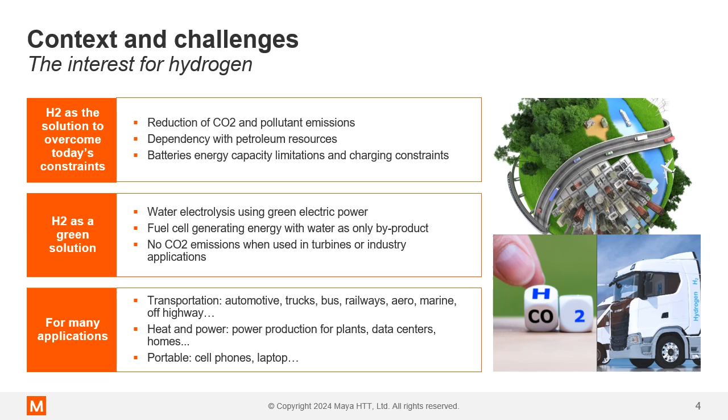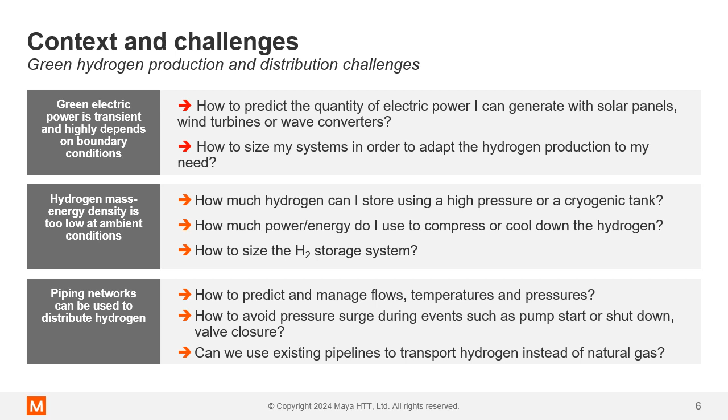Now, let's consider how simulation can help address the hydrogen industry challenges. With simulation at large, we have a typical set of challenges to overcome. For example, what effect do changing conditions have on my system's performance? How should I size my components relative to performance requirements? What about auxiliary systems like thermal considerations or even cost? And how can I predict and control conditions such as pressure, flow rate, and temperature without a prototype to test?

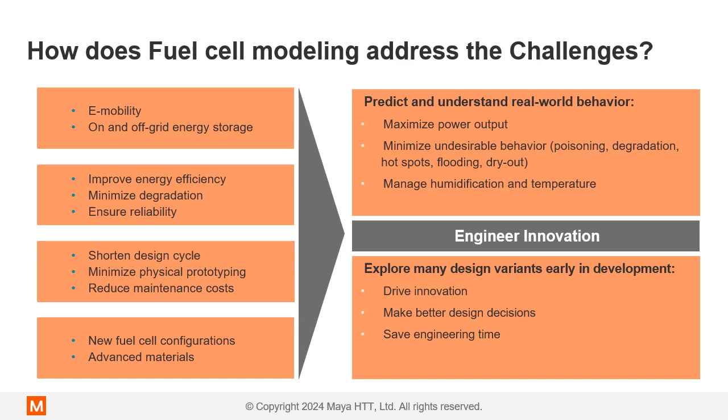Modeling and simulation offer a quick and effective way to assess the performance of many systems, including those in the hydrogen industry. They allow us to predict real-world behavior, improve efficiency, ensure reliability, and evaluate multiple configurations, all while minimizing cost. Any and all of these are possible given the simulation capabilities offered by Siemens Simcenter solution.

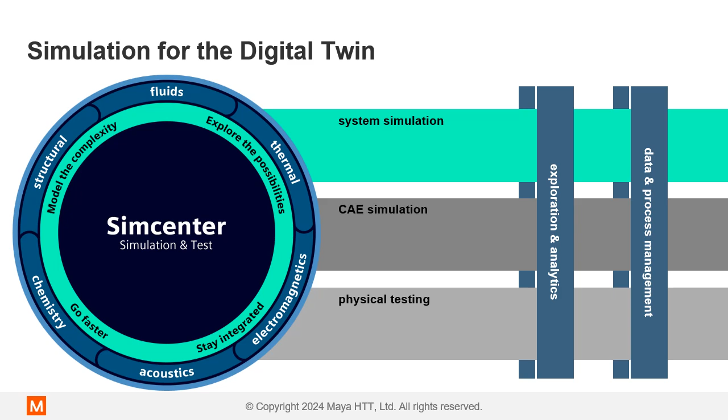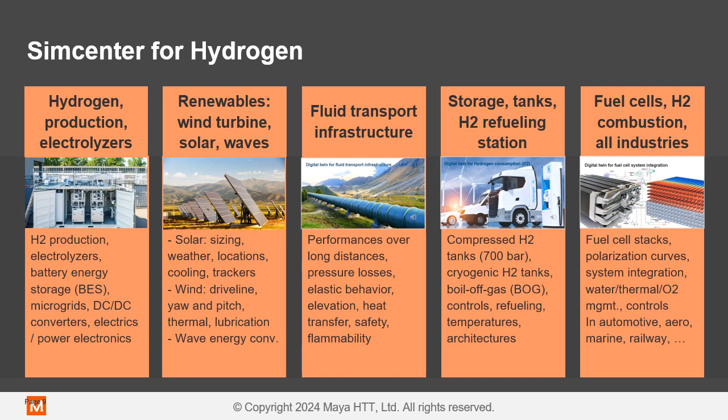So let's begin with looking at how simulation can help you produce a digital twin, first for green hydrogen production. With our system simulation tools, we're able to model all parts of the hydrogen production network, including alternative energy sources, electrolysis, and onto storage. These system simulation tools are able to predict in seconds the distribution of hydrogen production over a period of months, with mixed energy sources coming from things like wind turbines, solar panels, wave energy converters, and more, then feeding energy to the electrolyzers to store the energy afterwards in hydrogen tanks.

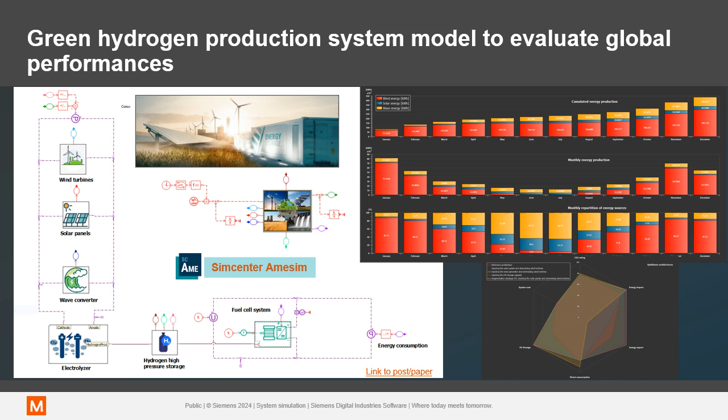So you can see here an assessment across a year in terms of the contribution of different green energy sources and how they fed into the system for the production of hydrogen. If we wish to look at a more component level in more detail, then we can use something like CFD to do the simulation of the electrolyzers themselves in much more detail and spatial resolution.

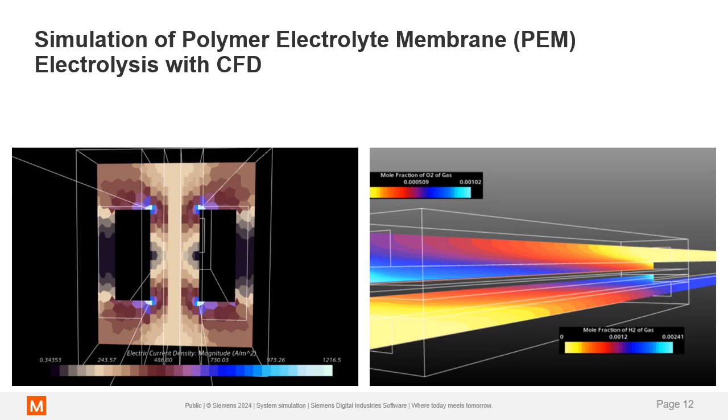Now let's consider our second example, digital twin for fluid transport infrastructure. There are a number of different possibilities for modeling and simulation to come in for the transportation infrastructure.

First would be transportation of purely gaseous hydrogen, where we can look at things like sizing and selecting compressors, and looking at the valve conditions for flow and pressure drop across the system.

For liquid hydrogen transportation, we can do other things like heat exchanger selection and design, looking at operating conditions to avoid things like pressure surge, and also being able to predict cavitation and flashing, and then evaluating methods for mitigating that.

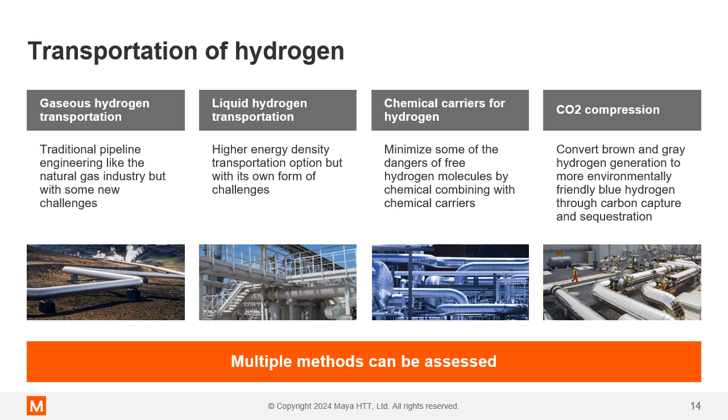On the storage side, we can use simulation for tank filling, which can allow us to model and capture things like pressure rise, temperature evolution, which in storage can reach critically high values, as well as capturing the buoyancy effects, including stratification of the fluids in the tank.

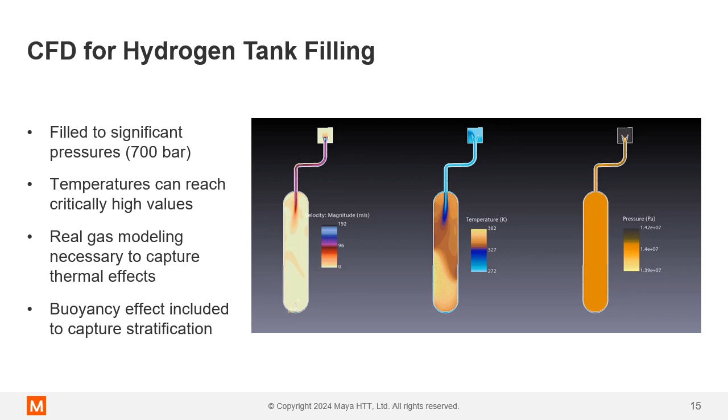Additionally, the Simcenter portfolio offers a complete solution to cover the end-to-end simulation process for something like hydrogen storage. We can cover the component design thanks to a strong CAD integration, leveraging our best-in-class finite element preprocessing, and then also our capabilities for the simulation for composites manufacturing and the simulation of composites in a structural context as well.

All of this can come together, for example, in the problem that you see in front of you, which is the structural analysis of a Type 4 storage tank made with composite materials.

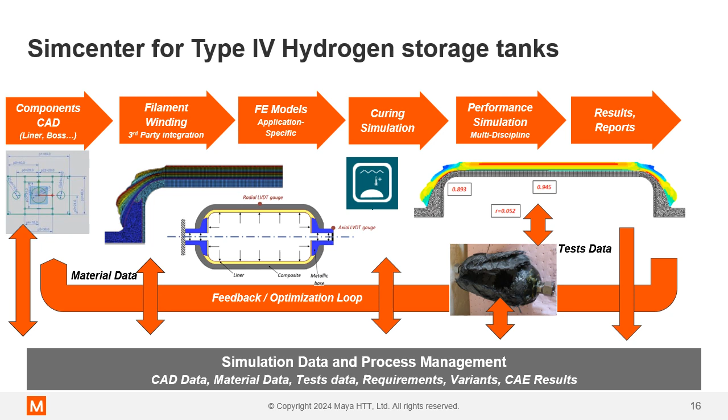The fourth use case I'll introduce today is one of the digital twin for fuel cell systems integration.

Simcenter comes with a set of models and tools dedicated to the fuel cell stack simulation, from functional models to more advanced ones integrating more and more physics at each step.

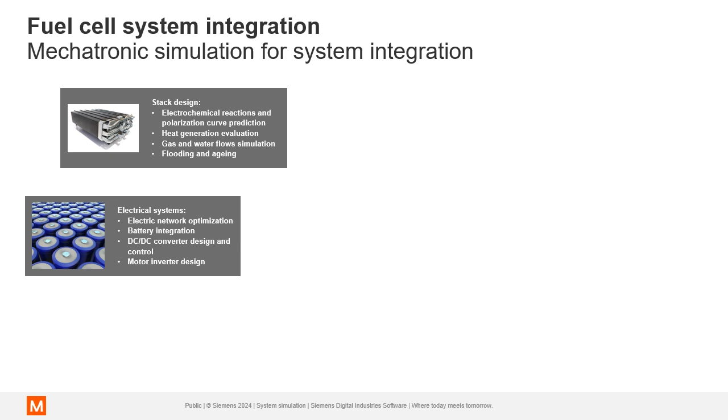Basic stack design is possible, integrating electrical systems like the battery integration, DC-DC converter design, or even motor inverters. Looking at thermal management of the entire system, predicting stack temperature, looking at thermal exchanges and cooling options.

Modeling of the air and hydrogen loops to look at the dynamic gas flow and the composition of those, including humidity management. Extending the simulation to the powertrain for electric motor and driveline design, as well as the overarching controls for different energy strategies, and also for the strategies for the feeding of fluids into the fuel cell.

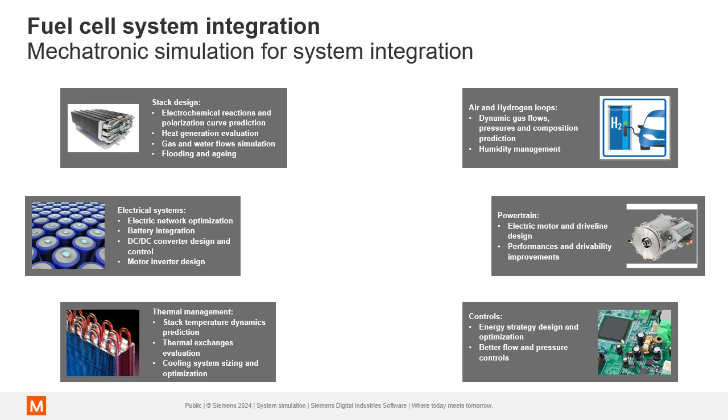All of this can come together, either one or all, to represent subsystems and their interactions and integration together.

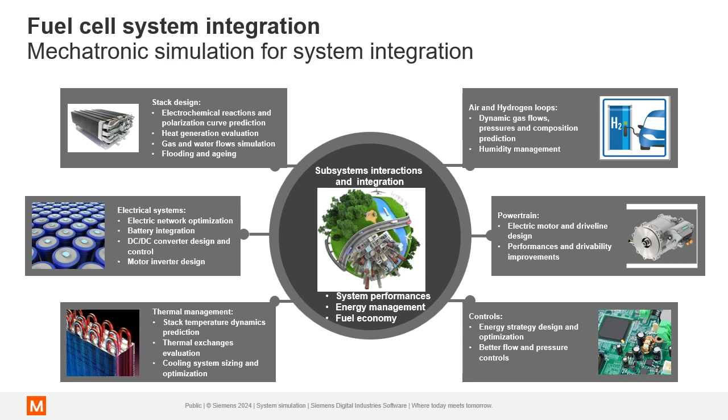When you need to go deeper into detail with the design of the fuel cell system, you can integrate more physics into your model. Instead of looking at just the fuel cell as a single component, you can integrate more details and consider even more subsystems and add them as your project matures.

You can now evaluate the interactions between stack, cooling system, air and hydrogen feeding, and the extended complete electrical network. With this type of model, you can also more accurately evaluate the stack performances and losses, taking into account temperature, pressure, gas composition, and humidity.

This type of model also makes it possible to evaluate the impact of the compressor and other controls on the whole performance of the stack, and the impact of these controls on the efficiency of the entire system.

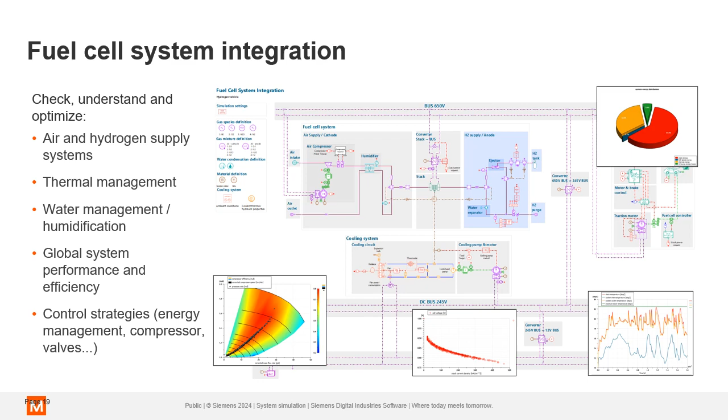Again, if we want to go to the geometry level, a more detailed analysis is often possible with CFD as well.

Modeling of fuel cells with CFD allows for single phase for proton exchange membrane, where any number of reactions can be specified. Multi-phase flow for proton exchange membrane fuel cells as well, where we can look at flooding and membrane dryout. We can even predict parasitic reactions for the lifing of the fuel cell, or just tracking things like sorption.

Additionally, we can do single flow for solid oxide fuel cell analysis, once again for modeling any type of reaction, and also electrochemical and ohmic heating can be accounted for.

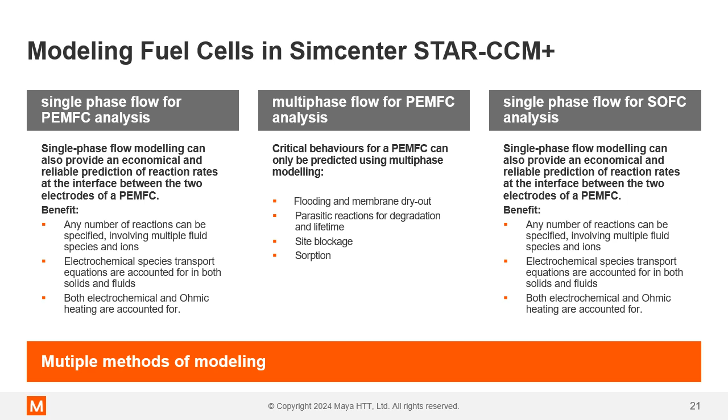Now we'll move on to simulation for hydrogen consumption, and here we'll split this into two parts. First, we'll start with the stationary applications that we mentioned before, like combined heat and power, and residential applications.

So for this first example, we can extend the scope of our simulation efforts by looking to include the entirety of the infrastructure in question.

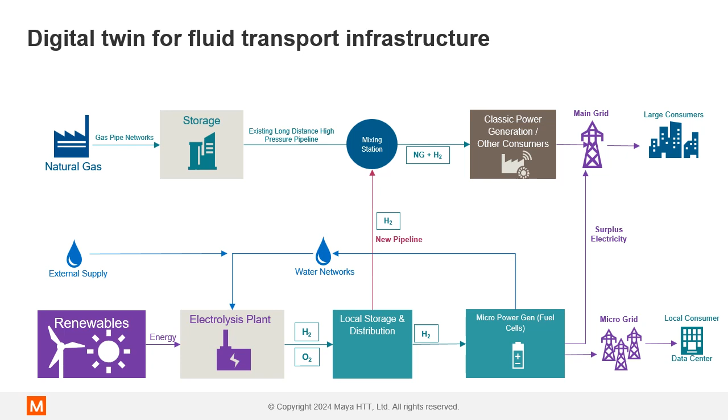So in the example we see here, we're looking at a green hydrogen-based microgrid that was built up using system simulation. More of the focus is put here on the electric side by modeling, for example, the microgrid that we can see, the DC-DC converters and other components as well.

Ultimately, the goal of this model in particular is to optimize the global system efficiency and consider thermal management. We can see here the breakdown of energy across either a day or at the month level across a year.

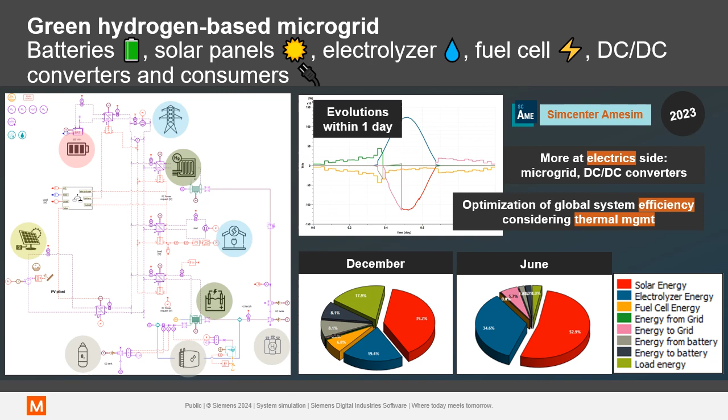Here we see a second example where we've taken a solid oxide fuel cell in a combined heat and power residential system. This model differs slightly because its objective is to show a system model of the complete residential system with reformers, afterburners, batteries, grids, loads, and controls, where we're actually looking to evaluate the total cost of the energy production depending on the energy mix across a year.

Depending on the energy mix across a year.

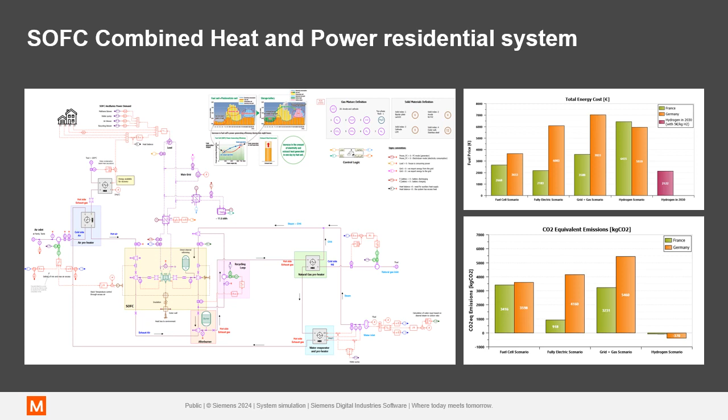So as a counter to that, we can move on to the digital twin for hydrogen consumption, this time in terms of the transportation industry.

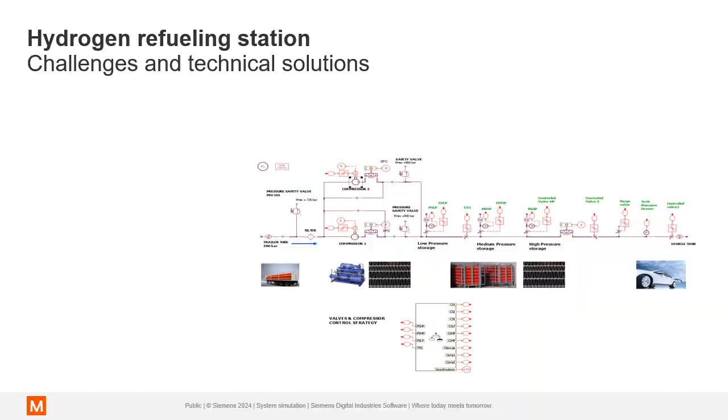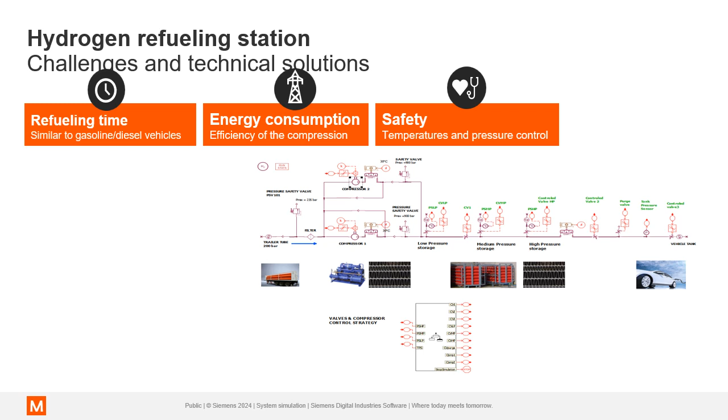And here we can see examples for not just the vehicles that use them, but also refueling. So we can consider the following challenges for refueling stations. Refueling time is critical and needs to be close enough to conventional methods to be worthwhile. Energy consumption needs to be reduced and mitigated as much as possible. Safety is of utmost concern and must be validated for all different scenarios. And obviously cost minimized as far as possible without impacting quality.

So all of these can be assessed by looking at a system architecture in terms of the entire refueling station, and we can see that here in this example. This allows us to do some basic analysis which will inform component design and sizing of things like heat exchangers, compressors, and valves, as well as evaluating different control strategies in this system.

So do we need to include multiple compressors? Do we need accumulators or buffers in the system? How many vehicles can we realistically connect? So on and so forth, as well as evaluating different alternatives for the architecture and then performing robust analysis and optimization as well.

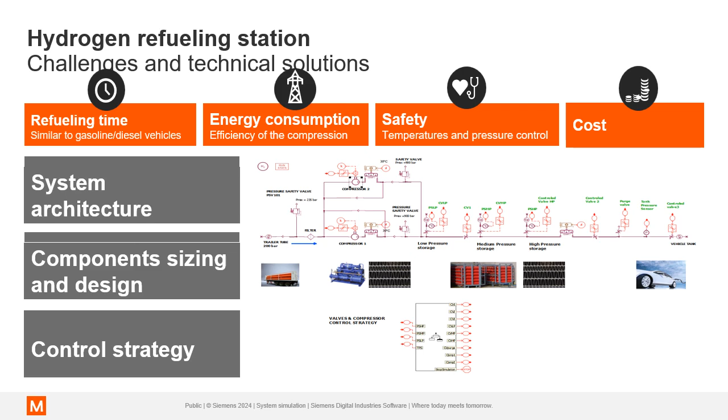So a model like we previously saw can give us a lot of useful information. The results of that model can allow us to quickly evaluate the evolution of pressures and temperatures of the flows in different parts of the system.

We can predict the time it would take to fill a vehicle tank and then also recharge the fueling station's pressurized tanks and look at the temperature depending on the speed of the refueling and evaluate control strategies to manage that. Additionally, we can look at sizing the heat exchangers to keep the gas in the right operating temperatures depending on what part of the process we see.

Also allows for the animation of a lot of these different parts of the process for better information delivery in terms of the results.

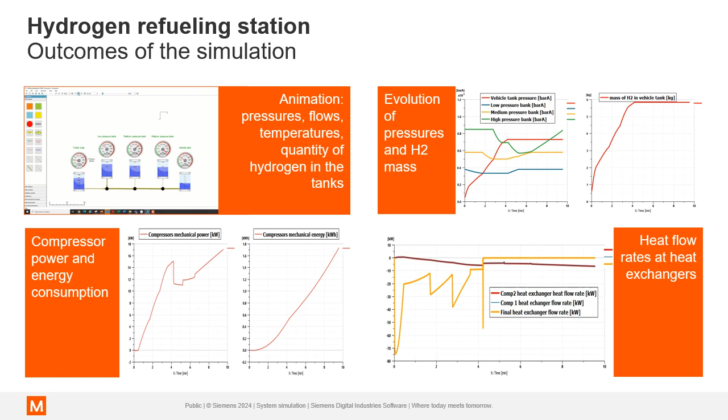Beyond just the modeling of refueling stations, we can also look at the integration of fuel cells in the actual vehicles. So in this case, those can be placed in any of the major streams of transportation, whether that's automotive, where we can evaluate vehicle type, road conditions, and the drive cycle's effect on the fuel cell.

In the marine industry, where we can evaluate then things like sizing for the sea state, the propeller parameters, ship resistance, and the different missions, as well as aerospace, where we can also look at the flight mission, the power budget, the flight dynamics effect on the performance of the fuel cell.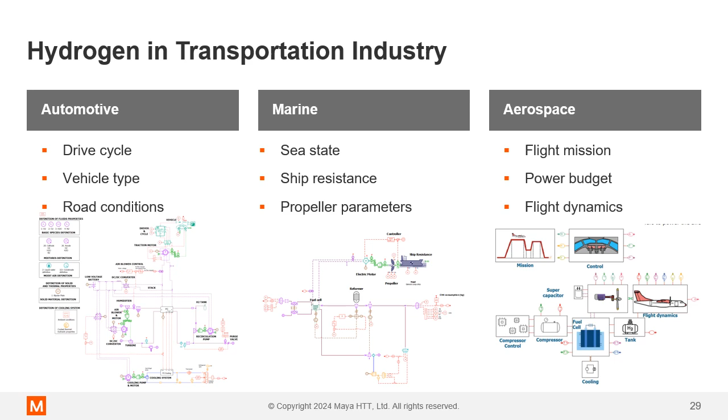Beyond just modeling of the fuel cell integration into a vehicle, we can also do the simulation of hydrogen combustion, where we have things like modeling and simulation of hydrogen turbofans, where we can select the correct architecture, validate the on-design results, but also predict off-design performance and thermal considerations.

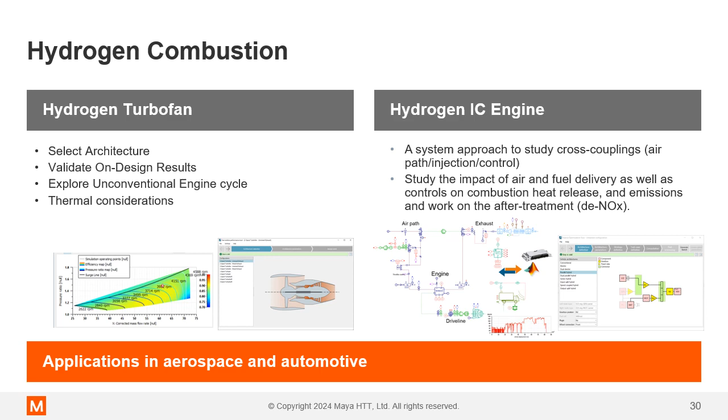Additionally, for the automotive sector, we have hydrogen internal combustion engines, where we can use a systems approach to study the coupling of the air injection and control, and then the impact of air and fuel delivery on things like emissions.

So in conclusion, simulation with Simcenter can really help address challenges of the hydrogen industry across the board. The extensive multi-physics platform can allow simulation of any part of the system or all of them together. It allows for sizing of subsystems and components and looking at various operating conditions.

We can better integrate those subsystems at a really whole system level and improve performance in the short term or large scale for improving ROI. It allows for more detailed modeling of systems to really better understand component behavior or system behavior, whether it's at a microscopic or macroscopic level.

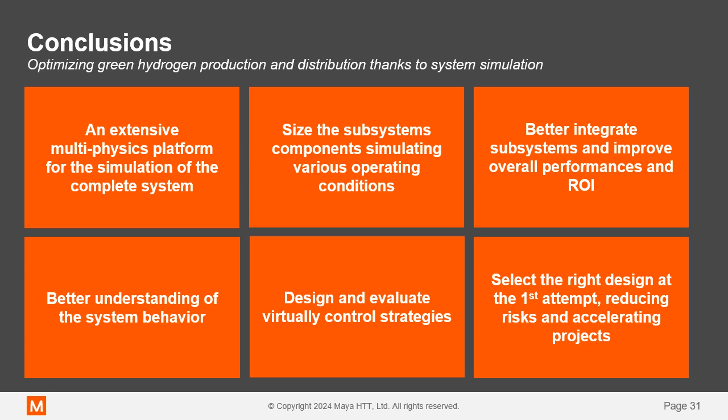And then those models can also serve an extended purpose in virtually validating control strategies against a model before prototypes are available. And then obviously for selecting the right design as quickly as possible, reducing risk and accelerating project timelines.